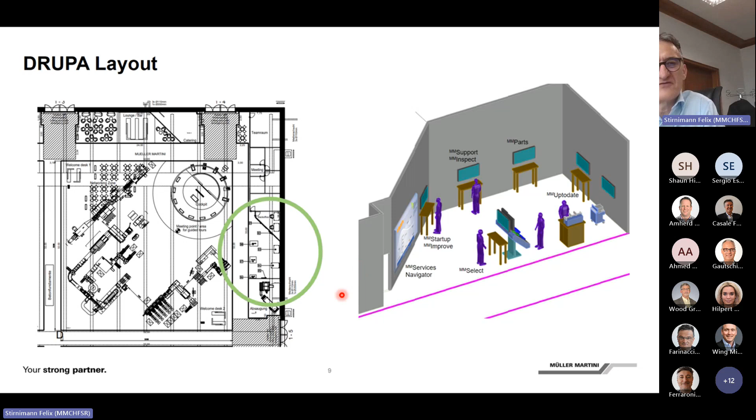That would be then the point to find the needs from the customers and to start, stimulate, or close business in services. So that's the setup we're going to have. And I would go on with the services navigator. We changed slightly the look and feel of this chart, but I would like to quickly show what's new.

So first of all, we have our service promise written here. Then we slightly adapted the logos to make them more modern. It's still with these hills like that. And we see that we have the startup here, all the basic service products here.

MMInspect, sorry, I have to say, this curve shows the capability of a machine after the installation. It gets faster, the quality gets better, the output gets better, the uptime gets better, everything gets better. But there is a point where we reach the peak, and then it starts to degenerate. And then we have our tool, MMInspect, whether it's used as a one-time inspection or during a maintenance intervention, where you go and check the machine and bring it up again.

And bringing it up again is together with Up to Date. You can do that multiple times, especially when you have a maintenance agreement. Then you have here a ripple, and the goal is really to keep the output of this machine on the highest level possible. It ends with startup, either a dismantling, a relocation, or scrapping of a machine, and then Select below as our service agreements.

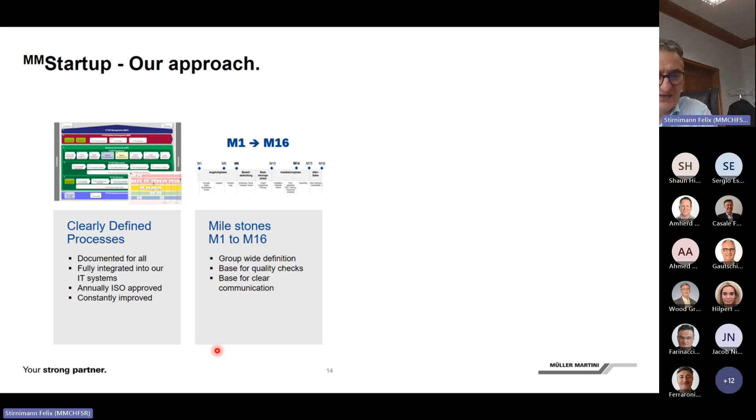We have assigned project managers for the projects, and they can be local or they can come from the factory. And the good thing, there is a direct link back into R&D so that we can solve problems in a fast way.

Further, we have commissioning types and target times. So commissioning types means we have predefined, for each project, who has the responsibility. Is it local? Is it local, but supported by the factory, or is the responsibility fully in the factory? So this is defined when a quote is done.

Then further, we have predefined target installation time as a starting point to make quotes. Although this is only a starting point, each project might have different issues so that you need to adapt the installation times. And this is as well then the base for the controlling and the reviews that we do on a regular basis.

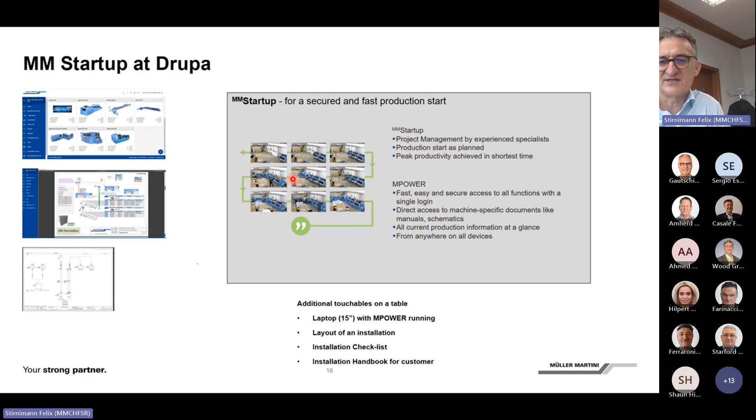Now, next, improve, as I said, is on the same post. There as well, what's the customer view about training? Things that are in the mind and keep the customer awake at night. Could be that he has retiring people, which is quite often the case. They are leaving the company, and they have to find new people. And then sure, training will be an issue.

Or what needs to be done to get more production out of the line. Then when he has an old line, will I find someone to run my machine, who needs to be trained as well? Or the other thing is, how can I keep Leo, my 25-year-old binder, because he's really the best in my operation?

And then clearly, from the sales point of view, our answer is buy a new machine, so that you have an attractive machine and keep the operators. But then when Leo has this beautiful Publica Pro, the question of the customer will be, can Leo handle this new Publica Pro technology as well, which is linked to the training.

And finally, will he be able to run 100,000 books a shift in April, so that he can really master this machine and get the best out of it? All of that is linked with training, whether the operator is capable to do that. Now, for that, we have our approach in Improve, how we can support our customers.

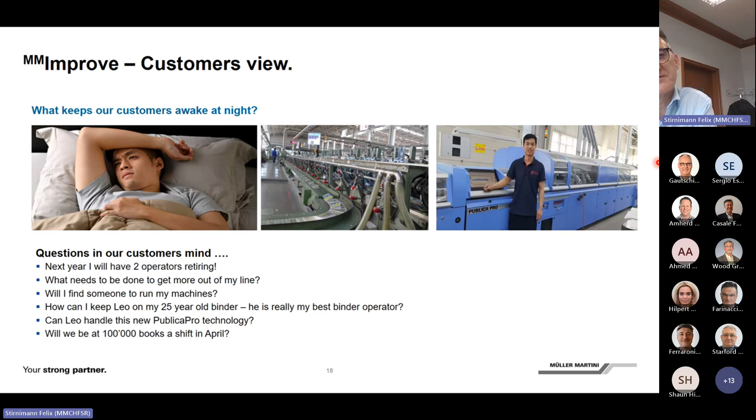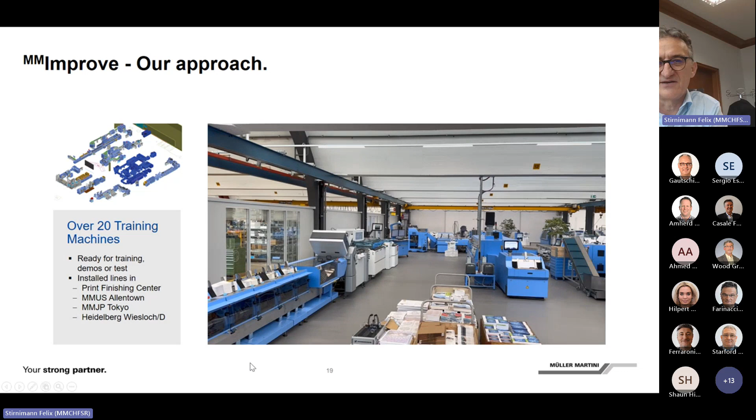So first of all, we have over 20 training machines. I need to swap the pointer. Here, that's a look into the training center for those who haven't been here lately, with all those machines where we have 20 production lines set up. So we have them here in the print finishing center. We have in Allentown in America.

We have machines in Tokyo, and we have now as well in Heidelberg, Wiesloch, a nice machine where we go if you need to do training. So we invest heavily. That's a huge investment just to have all these machines up and running, ready for training, demos, or tests.

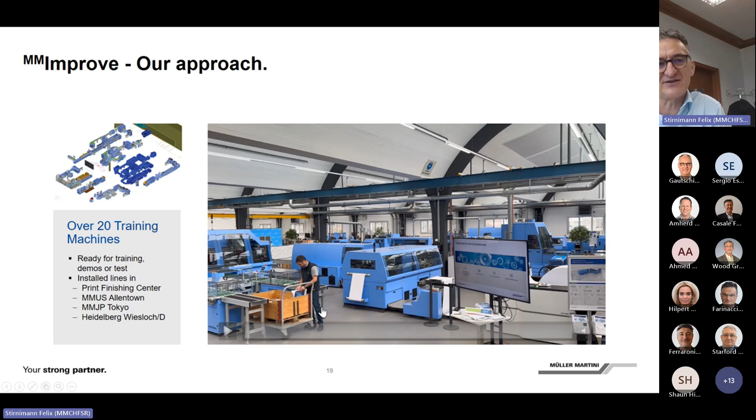Then we have very experienced trainers; on average, they have 25 years of experience at Müller Martini. We have over 10 full-time instructors in Switzerland and Germany, next to all the instructors who have a double function, who sometimes are also service engineers, but if there is a demo to do in Allentown or Tokyo, they are the ones chosen to do that. So we have really experienced trainers.

Then we have modular training blocks for customers and for ourselves, be it for Müller Martini or agents. And we have fixed pricing for the training, the PFC, where you pay 500 per day in person. For the customer we have 2 different types of products for those 20 machines. For each machine we have either a basic operator training or an advanced operator training. For this we have a brochure that explains what's in this training.

And then we have all the Müller Martini or agency trainings, where we have the basic technical training, the advanced training, the technical support training, the technical training for sales, and then the bookbinding technology training course, where we dig deep into bookbinding. And there's the MMTTT, the technical trainer training, that we are working on, which will come soon.

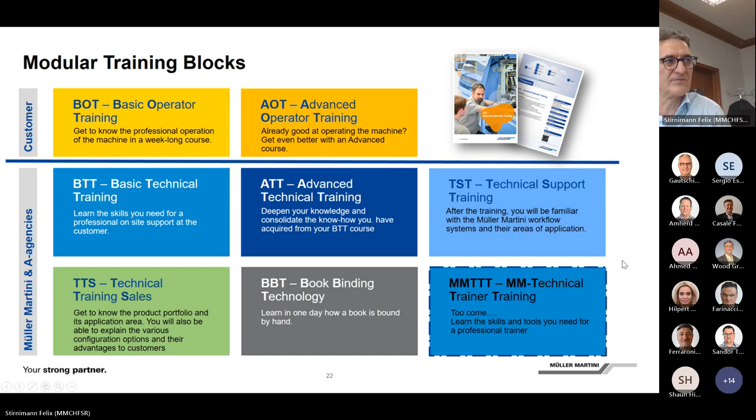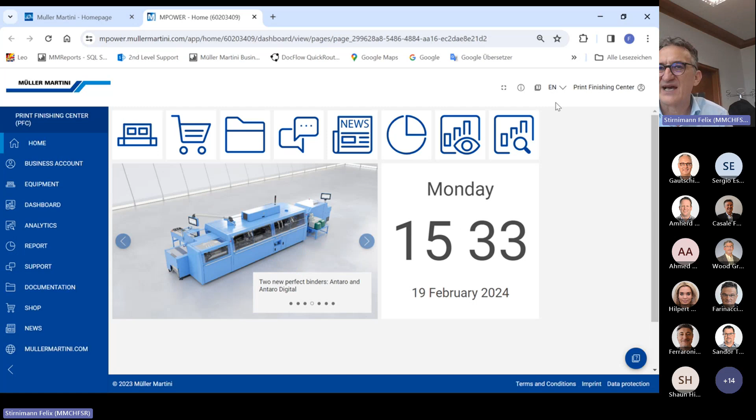Now, it's important to say I'm in as a Müller Martini employee. To be honest, I was too fast. I wanted to show something else, actually. How do I get out? Now you got me. Why doesn't it work? No. Sorry, I want to show you something different, and that's why I have to start again. Here.

So I go in here, then I say Müller Martini, then we are here, then I go to the starting page, I go to MPOWER. Now, that's normally the way you go in. Then I have to log in. Now I have different options here. I go in with my own login as a Müller Martini employee. Then I have to key in my password here.

So, and now I'm in the service point. That's something where you get all the information for all the installations in your area for the customers. You find there about it. Now I'm interested in, I go into the PFC, Print Finishing Center. You can get on the Print Finishing Center as well.

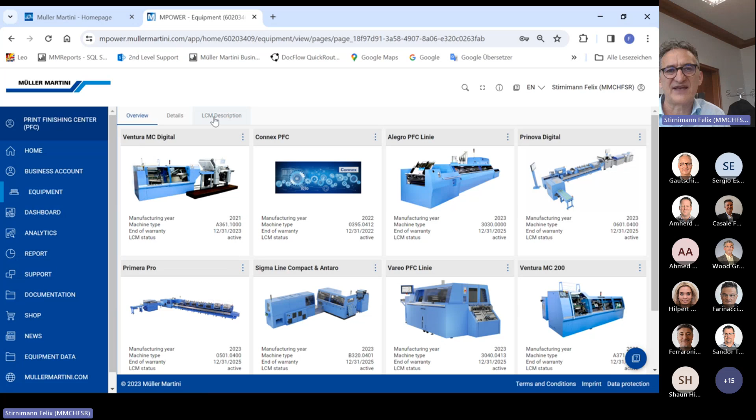That's the brochure. So you see in the brochure here all by phase for equipment, support, up-to-date and parts, what services we offer. And then you can have details as well. So you go into the various machines. So you can say, give me the Alegro. Then you see the Alegro line consists of all those elements, set up with all this information that we have. So that's what you can see of the installed base, our digital twin that we open up as soon as a customer buys a new machine.

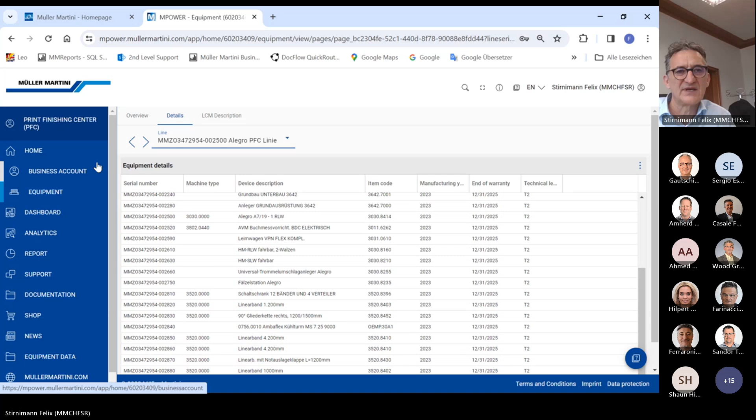Then we go on into the documentation, another important point for the customer. And before I do that, I go quickly now and change the user. Do it like this, I believe, yeah. Because I go in now as a customer. I go in like the PFC set up like a customer view. Now, yep. So I'm now in the PFC as it would look for a customer.

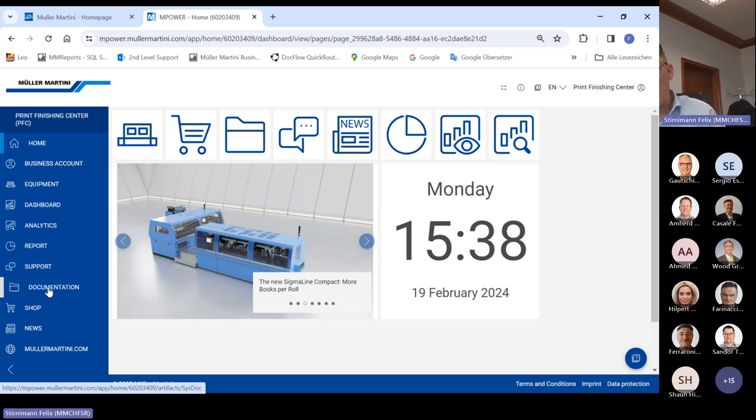And you see here up, it's not anymore this view that I just explained before. You're directly into the home. So when a customer buys a new machine, he gets the documentation, which is an important fact for the startup and the training. So here, first of all, you have layouts. Here we have two layouts. You get the assembly layout, meaning the way the machine was installed and delivered here. That's the Ventura, how it is set up, like that.

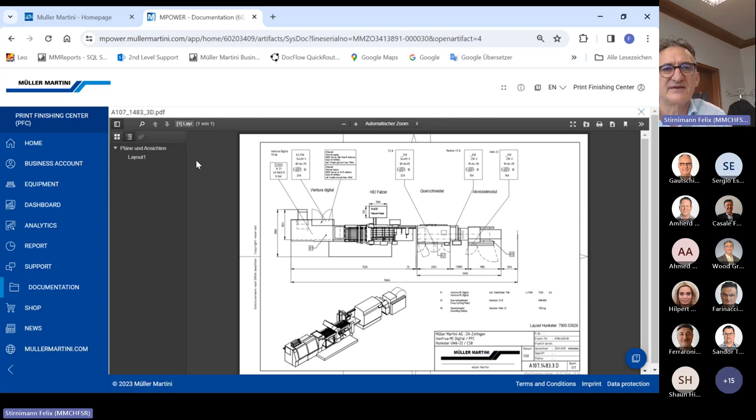That's one thing. Then I go back to documentation here. I have the network diagram. I can swap the machine. I go to Primera Digital here. Then I see here, I got the layout. I have here as well the network diagram. You can always choose whether you want to have it in this screen or whether you want to download the product. When you download, you can select the language as well. So I have English, I downloaded it.

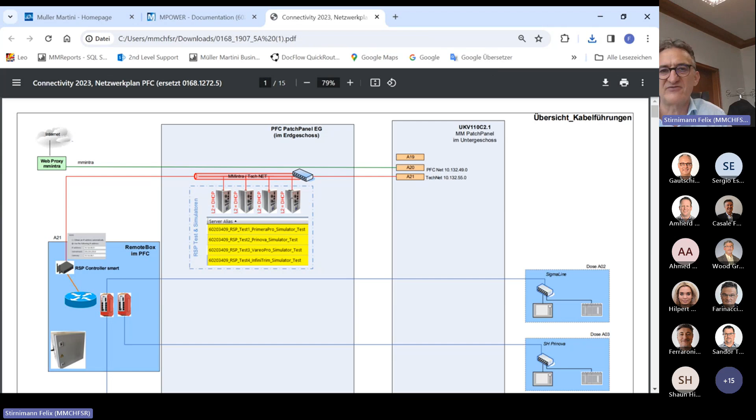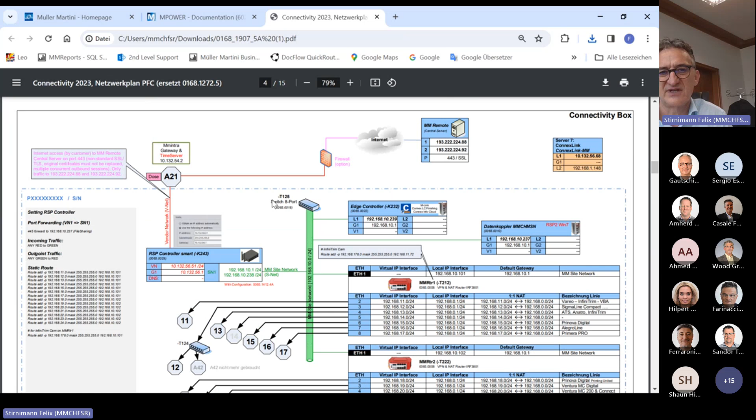And then here you see it's opened up, this download, and then you have a full screen PDF in the viewer. Now you see the setup of the training center for the network, like that. Now let's go quickly into the Primera Digital like this. I can zoom in like this.

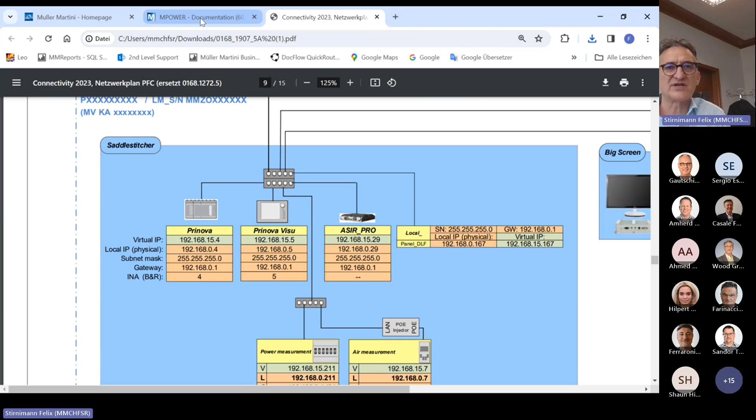So here on the saddle stitcher, we have the Prinova, we have the overhead screen there, we have the visualization, we have the ASIR Pro router. Then on this machine we have power measurement and air measurement as well, with those sensors linked into a switch box. And with that, you see all the addresses. So all such information the customer gets, we get. And it's really stored at the customer's digital twin on MPOWER.

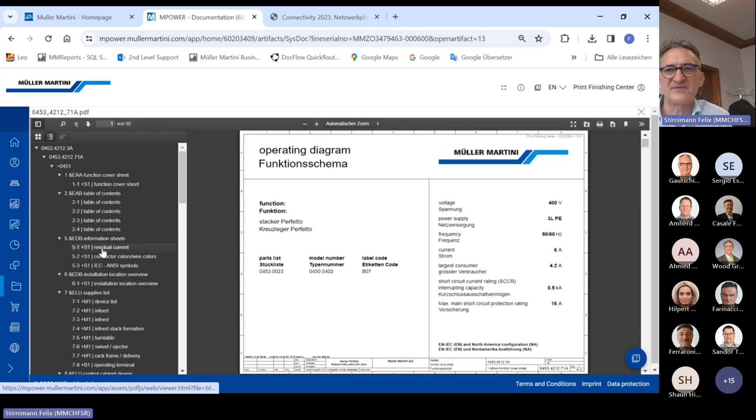Then we stay with electronics, so this corner. So we see here the schematics on the compensating stacker. So I can open up the schematics. I do it here in this screen like that. You have this function here that you can swap away the icons, or you swap them in, swap them out. We have here on the side the list of contents where I can jump to one. Let's say supply list.

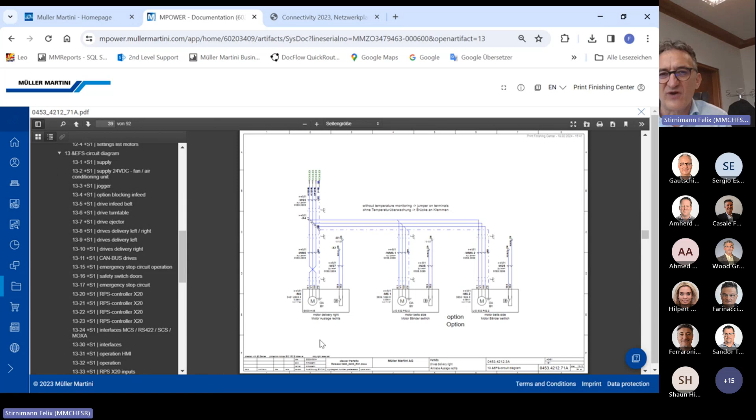Let's go down. So you see here all the items like that, and then it's a, how do I say, it's a PDF which has additional functions in it, so you can jump around when you follow a line like that, and then you go into that one, then you jump into the next sheet. So you can really follow the cable in the schematics like that. So this is one thing we got. I go back to the documentation here.

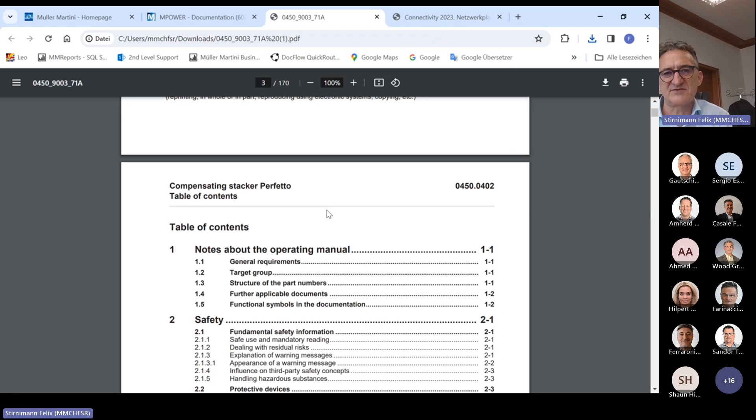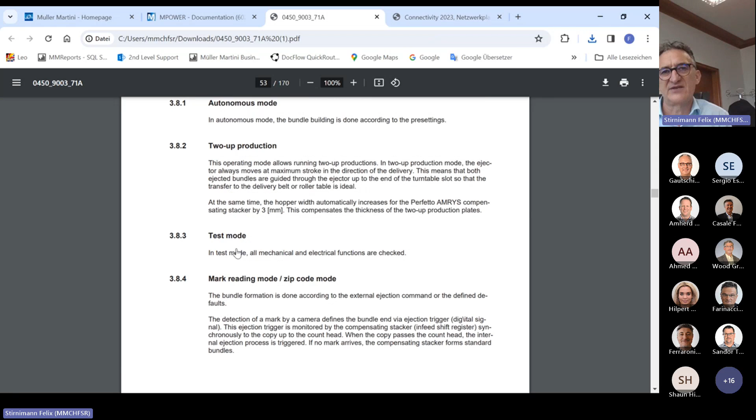So then we have the manuals, for sure. We can download the manuals here as well. Now I downloaded, let's do it here, English. I downloaded it here as a PDF. It's up here. And that's the manual as it is for our customers. Here as well, you have the possibility to jump around. So let's look for something, operating mode. You can click on it and then you automatically jump to that page of this document.

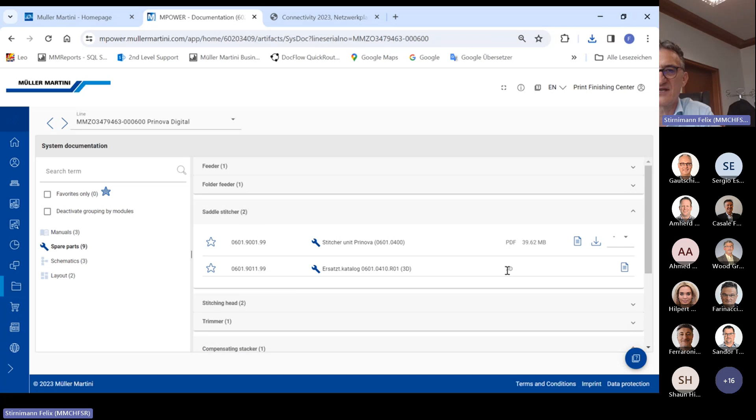So that's the manuals. And then we have as well a spare parts catalog, like this one here. So I go into the saddle stitcher. Now, with the new machines, we are now starting to come out with the 3D catalog as well. So we have the 2D catalog. This is here with the PDFs. This is still available now. But you can go as well into the 3D catalog like that, and I would like to show you how that looks.

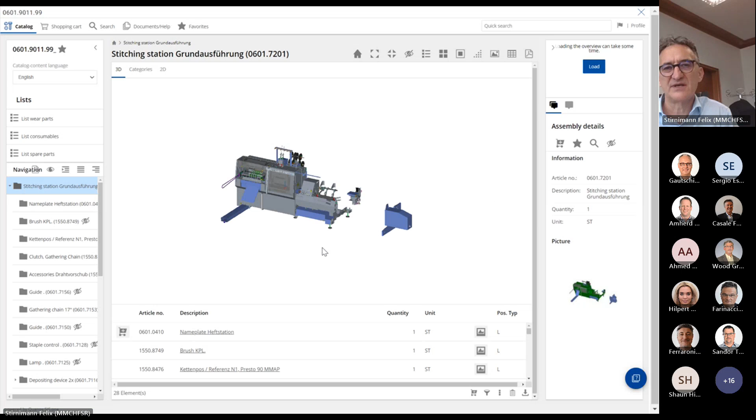Now I can make the screen larger, like this. I change to English, and it's already English here. I go into the stitching machine. Now I would like to go in, so I can zoom in. I can zoom. I can turn the machine around as I wish. And now I'm interested in something in the stitching carriage that's behind this one. So I select here, oops. This was too fast. I didn't want to have the guard. I want to have the stitching machine. I go in again. It was a double click.

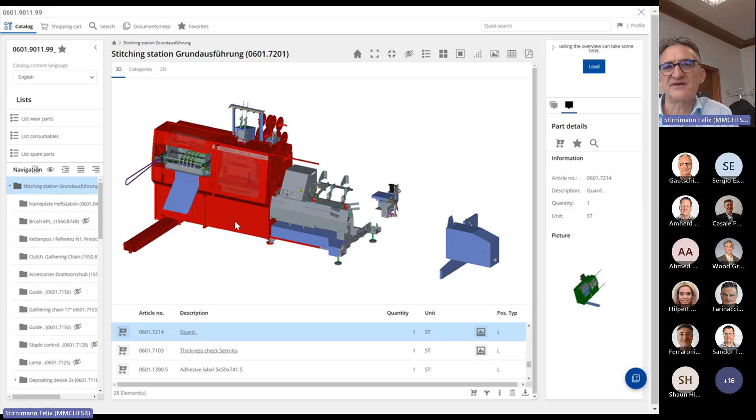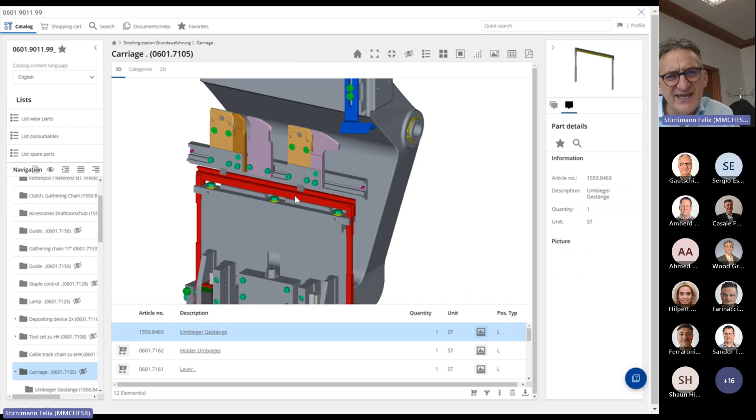So here I have the machine. The guard I don't want to see, so you can hide it here with this, so you see more. It's about the stitching carriage. That's this one. I can focus on this assembly, so it's more in the center like this. I can double click on this one, so I have now only the stitching carriage. So now I'm interested in this scale that's here somewhere. So I double click in and say, yeah, that's the scale.

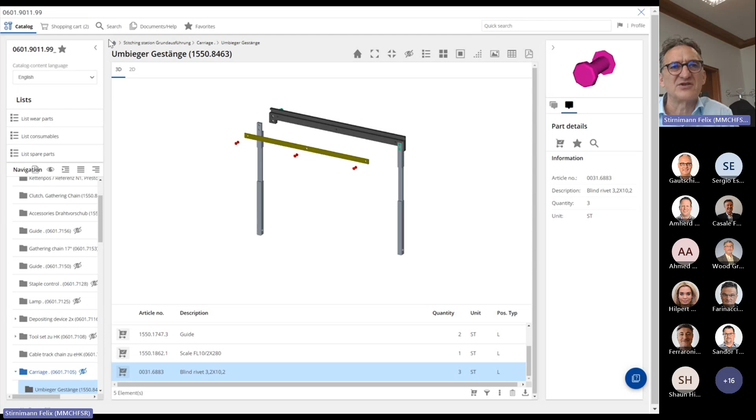I need this scale. So I take it and I add it into the shopping cart. And then I have the rivets here as well. That's the rivet, yes. I want to have them as well in the shopping cart, and add it like that. So I have here a shopping cart then. It's all done here, and then I can save it to the eShop like that. I go out here. I have the big screen. I bring it back in here so you can see that.

That's why we have not in stock. Nevertheless, if there would be, it's a Primera Digital, like always. If it's a new machine, then maybe you better call, because maybe we can arrange the product, get it out of the serial production that we are running. So this is about eShop, what the customer gets, but more to talk later.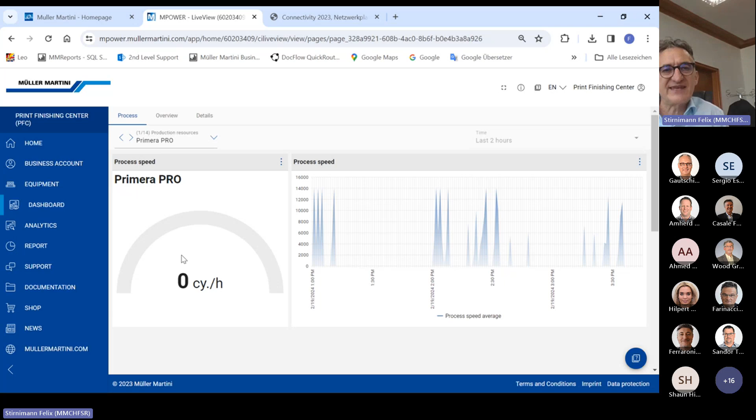And every customer gets that. If the machine is hooked up, then he can see what's the speed of the last 2 hours. And this is for free. But he needs to hook up the machine like that. And that's our goal. We want to have a lot of machines hooked up to our systems. If you want to get deeper into it, like this overview of the machines, then that would be a license that he would purchase on an annual basis.

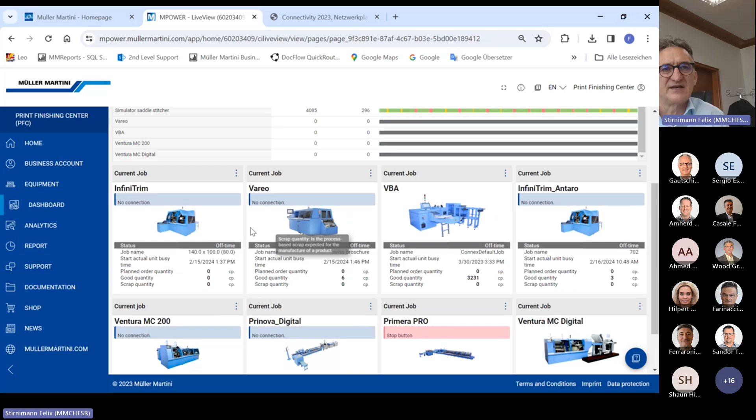Then you see all the machines, you see which machines were under production, how much production you have. So we have this view, you see an overview of all the machines. And this view is even customizable, the way you want to do it. Like that, or you have even details, then go deeper into the machines, or you see the top faults or the top stops on the Primera Pro that happened here over the last 12 hours. So you can choose the time as well.

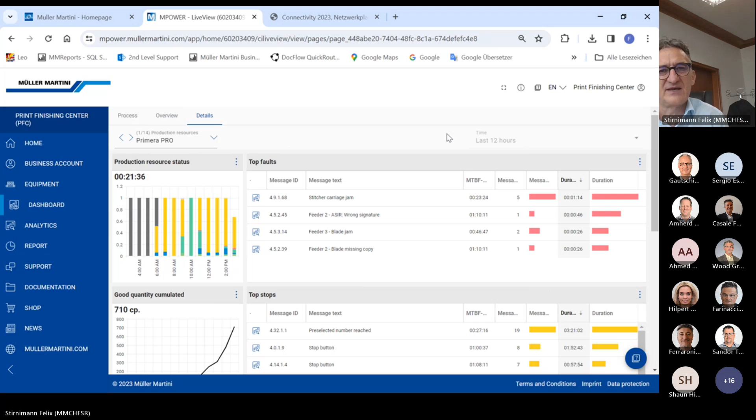Even more analytics is done with this analytics app, where you see an overview of a machine over a long period of time. You see the faults, the stops, but this tool is so mighty. Here you really have to go in and work yourself through and play around. Go on the PFC, play around with these various analytics, so that you have a good feeling what's available for our customers.

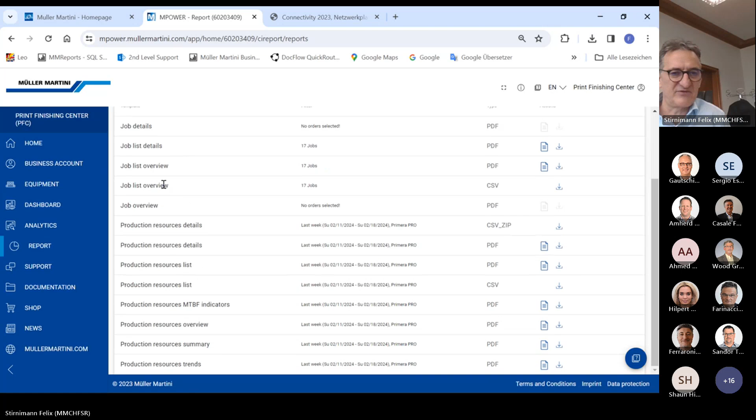Same for reports. We have here a bunch of predefined reports, really beautiful reports. And I want to put the focus on the last one here. That's the production resources trends. That's something that we promote as well during the Drupa at MMImprove, because with that you can follow the progress of an installation. I have that here. That's a trend report for a Primera Pro.

And so we have here technical indicators or operational indicators of a machine. And then you can say from this day to that day, or this month, last 2 weeks. And then you can see how is the setup. Is it getting better or is it getting worse? Or is the availability of the machine going down? What's the mean time between failures? Is it going down or up? Is the good quantity produced getting better? Production output, utilization efficiency. That's all a really nice report.

As I said, we measure that with MPOWER. We want to look at how the machine starts up, that this is really running smooth, so that we can keep our promise that we bring the machine up fast to its production speed. Now at Drupa, we have this screen for the improve portion there as well. We will have some visuals. We're going to have bullet points there, and the text that we're going to talk to would be like that.

Another important part for the startup of new equipment is having your operators understand the production line, the processes, and the workflow. With MMImprove, we offer a modular training program that can be customized to your needs. We have seen a big increase in training requests. And as a result, we have, next to our numerous field instructors, over 10 full-time instructors with an average experience of more than 25 years.

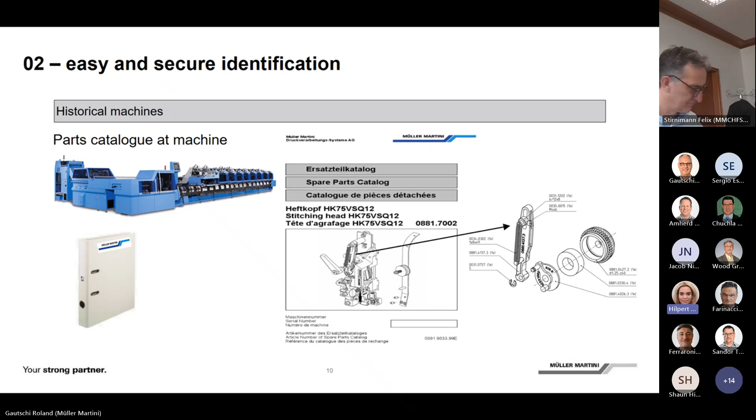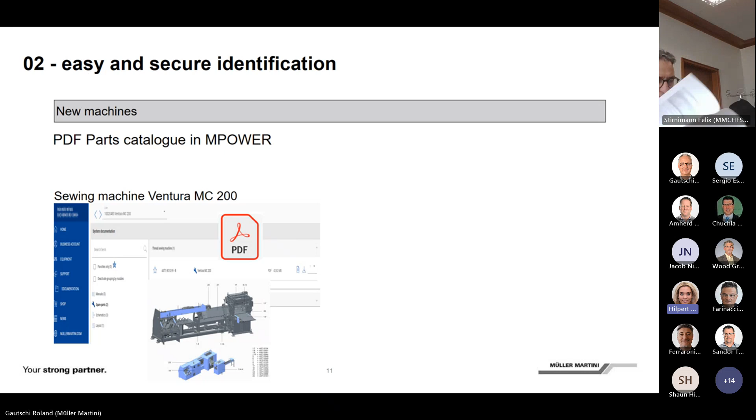Our customers have several options to identify their desired parts by themselves. For historical machines, as an example, you can see the parts catalog of a stitching head, where each component and its corresponding part number can be identified. And for new machines, as Felix demonstrated before on this sewing machine Ventura MC200, the PDF parts catalog can be directly downloaded in MPOWER, and the new 3D parts catalog on the right-hand side is also available in MPOWER.

Furthermore, the customer has several options regarding pictures to identify the required part. We have camera pictures, single as well as 360-degree pictures, which we make for commercial parts as well as parts with high consumption. On the other hand, there are CAD rendered pictures, used for drawing parts with low consumption and low value parts such as screws and bolts.

The customer also has the opportunity to download the documentation for some spare parts. And now to show you more in detail, I will enter the eShop and show you a few pictures and the mentioned documentation.

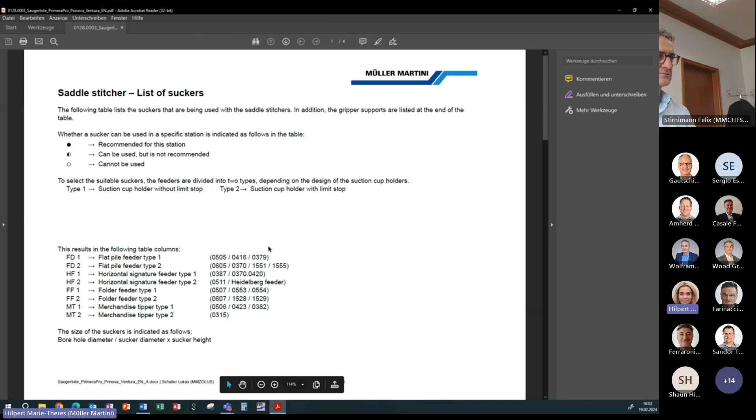And also the documentation. For example, this sucker here. We have the documentation in German and in English. And if the customer clicks on this link, then the PDF will pop up. And then here's all the relevant information about suckers and caps.

Okay, Roland, can you please bring back the presentation? Yes.

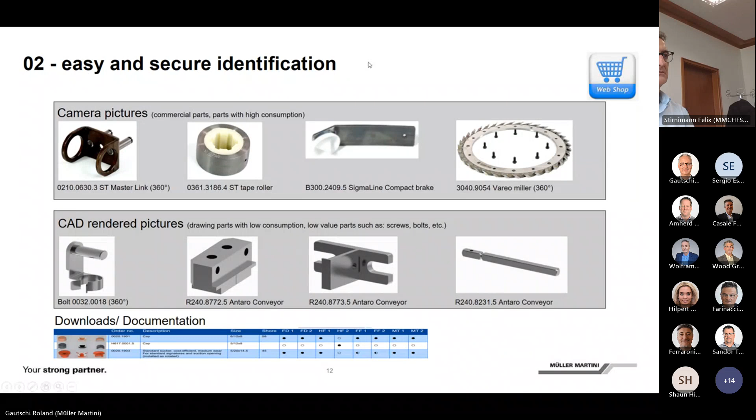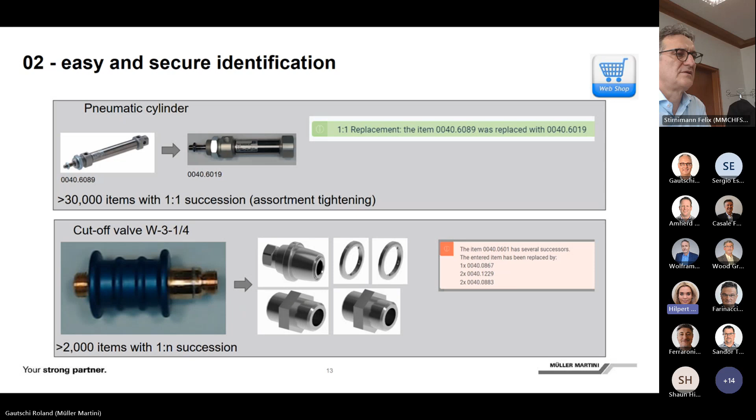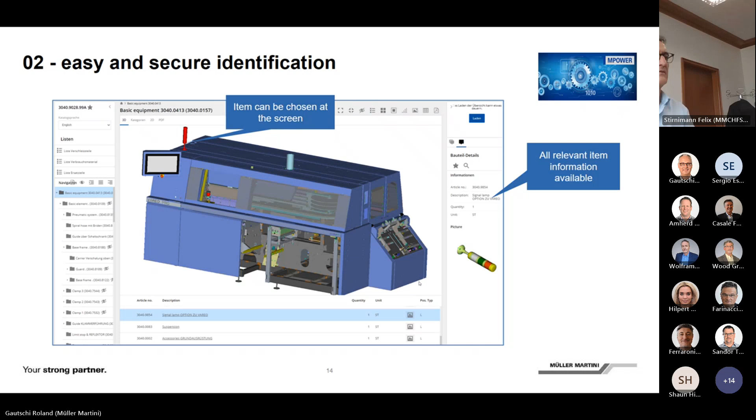And now I will hand over to Roland again. Okay, thank you, Marie-Therese. Thank you.

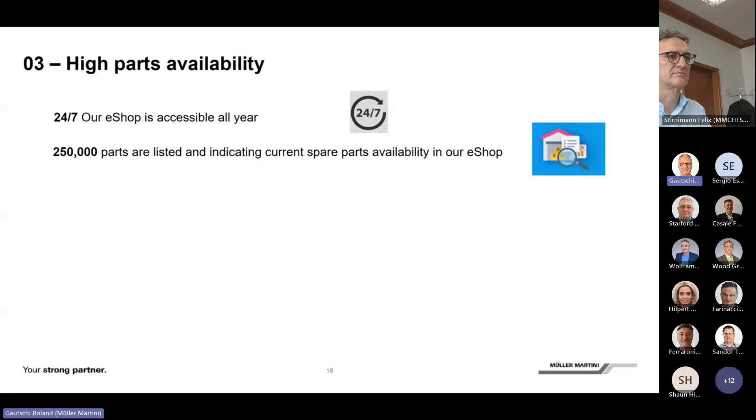Okay, now we are coming to the high parts availability. And we are really good at supporting you in parts. Please remember that. We have our eShop, and this eShop is accessible 24/7 all year. So customers can look for specific parts and availability all the time. We have more than 250,000 parts that are listed in our eShop. We are indicating current spare parts availability in our eShop as well.

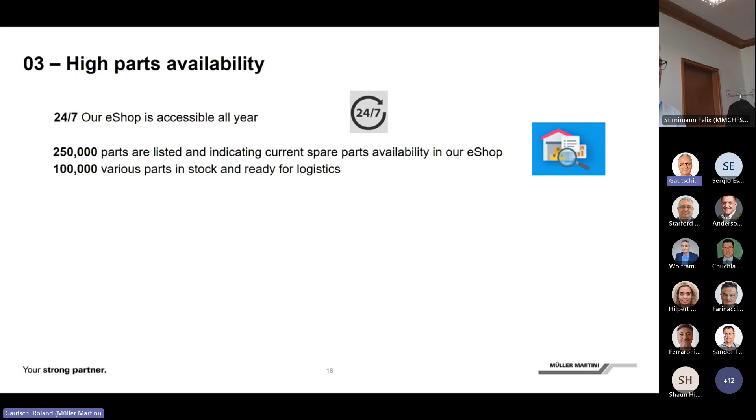We have 100,000 various parts in stock out of these 250,000, and these are ready for logistics. And that's the 100 million Swiss francs we have invested in parts. Besides that, we also take care of parts that got discontinued from our suppliers. So we have roughly 1,000 discontinued items in stock, and these are worth 10% of our entire spare part stock. So it's also a high number we have here to support our customers.

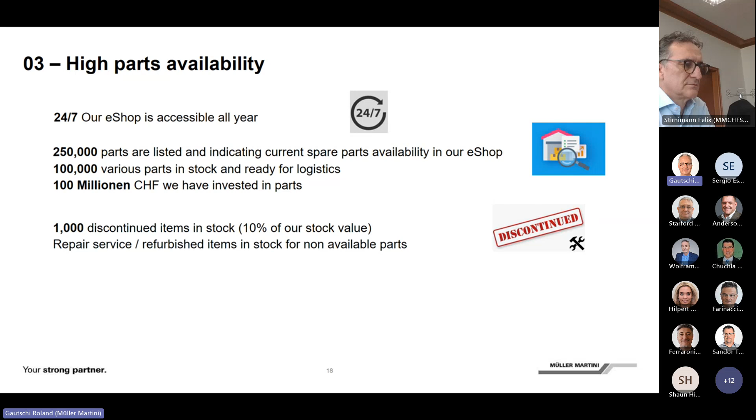And besides that, when a part is not available at all anymore, we have a repair service, and we also have refurbished items in stock for such parts. Now we are coming back to the same picture we had before, and Marie-Therese will show you more specifically regarding availability, delivery times, and so on in eShop. Yes, so I will take over again one more time. So I've talked about the identification of these parts before, and now I will show you the availability in eShop.

For example, this master link, I've put in 50 pieces of the order quantity, and 34 pieces are now available, and the expected delivery time for the other 16 pieces is 5 to 7 weeks. Or this bolt here, we have 70 pieces now available, and 30 pieces have an expected delivery time of 1 to 3 weeks. But there's also a third possibility.

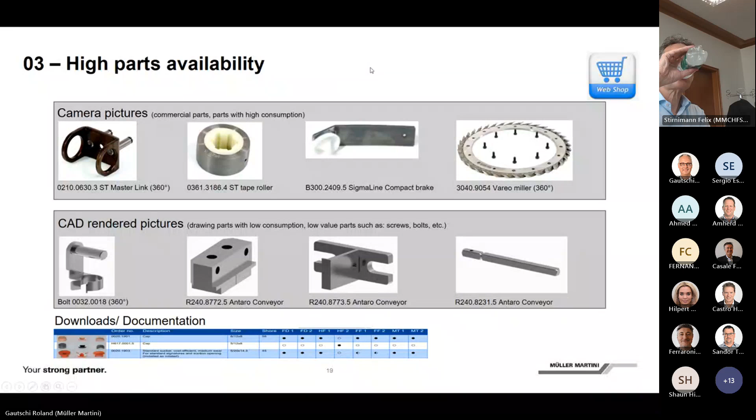Good. Last buy items. As I told you already, 10 million Swiss francs or 10% of our stock value we have in last buy items. These are over 1,000 articles or 16,000 pieces we have in stock, and an additional 21,000 pieces that are available at our suppliers. We bought them already and can have these on demand.

Only in 2022 and 23, we placed purchase orders for over 10 million Swiss francs for such items. And for some items, we have to do a yearly maintenance for servo converters and frequency inverters. That costs us also a lot of money, but we take that to make sure these parts are ready to use for our customers.

Here you see a picture of this so-called forming. This is something we have to do every 2 years, and we are charging the capacitors here so that this is fully charged and the customer can use it.

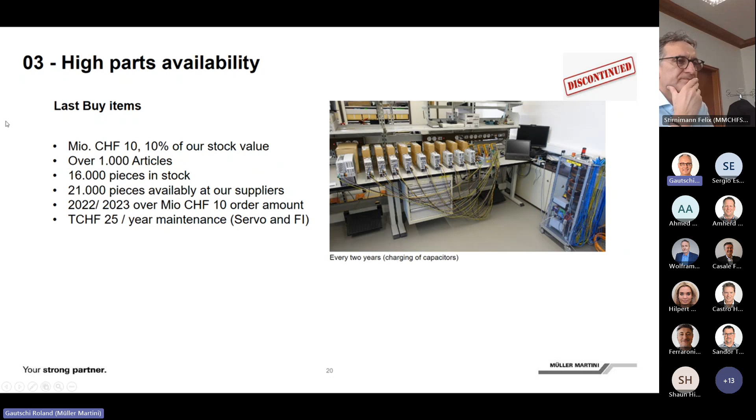Here a few examples, servo and frequency inverters for motors. We have on one hand the servo converter 9300 from Lenze. This one is in use since 2010. The discontinuation was in May 2017, and in 2019 we took a last buy of 100 pieces, roughly 500,000 Swiss francs.

Another example from Lenze is the frequency inverter 8200 Vector, also in use since 2010, discontinued in May 2017, and also here in 2019 we did a last buy of 350 pieces. This was a purchase order of 2 million Swiss francs.

And the newest one was the servo converter ACOPOS from B&R. This one was also in use since 2010. The discontinuation we got last year in January, and we had to do the last buy already in summer. And it was over 800 pieces, roughly 2 million Swiss francs we invested there as well. So 3 examples that we are investing a lot for such parts.

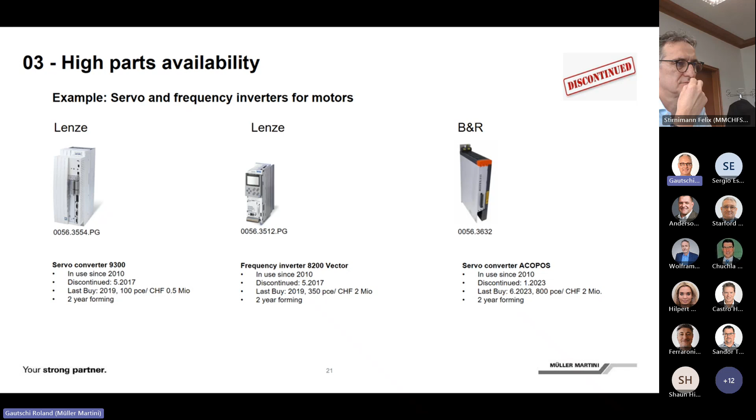If we do not have the parts at all anymore, we have a last chance to help our customers. This is with our repair service. So we are repairing defective parts from the customer. He will send it to us. We will repair and send the same part back to our customer. So we have nothing in stock, but simply a repair service of more than 100 items with these .R items that are active so that we can support our customers.

For example, you can see it here for the control unit. 2 examples here, roughly 20 pieces a year on the left-hand side, and here roughly 10 pieces a year on the right-hand side. So it's quite common to do that for our customers.

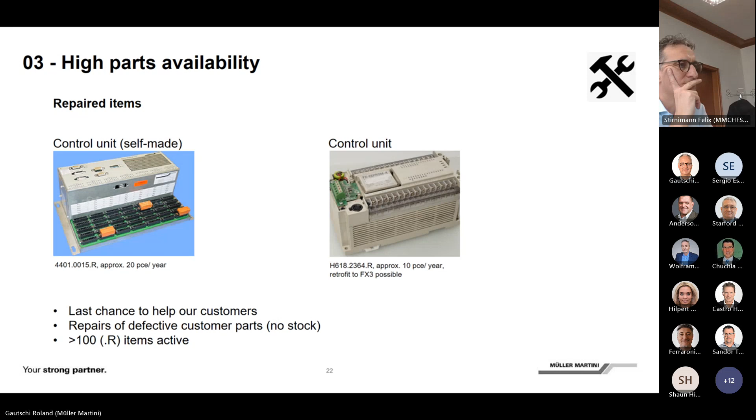Here you see the parts availability from stock for parts with frequent consumption. So the target line is at 91%. And back in 2018, we had a good matching, let's say, more or less of this target line, but then got hit by the coronavirus. We also got hit by the war that is going on in the Ukraine.

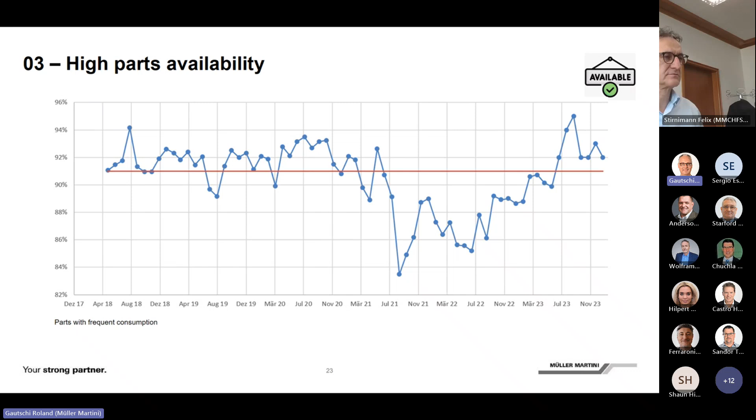This brought us down during the supply chain crisis in 21-22, but then we made it up again, slightly but steep, and are now back at the target. And yes, we can be proud that we have a good availability again to help our customers bring up their machines relatively fast.

Besides looking just at the availability of parts, we go a bit deeper and we look, okay, what's the machine behind? Is it, regarding our life cycle management, an active machine behind, a secured one, a limited or an obsolete? And of course, for active and secured machines, we have higher targets to support our customers than we have for limited or even obsolete machines.

If there is a high demand, normally we have a prognosis behind and we make sure that we have a high availability, that these parts are almost always in stock to send out to our customers. When we have a low demand for active machines, of course, we can sometimes go back to the factories that have something in stock that we maybe do not have at the ESC, and help out like this.

And also for the secured parts, we will look a bit closer, and even for parts that have longer delivery times, we make sure that these parts will be available in stock. When we go to limited machines, then with high demand, it's also with the prognosis. But when there's a low demand, normally it's on request, and we do not have these parts in stock anymore. And when we have an order from a customer, then we have to purchase the parts. And the same on the obsolete side, or sometimes we don't have a possibility anymore for the obsolete parts.

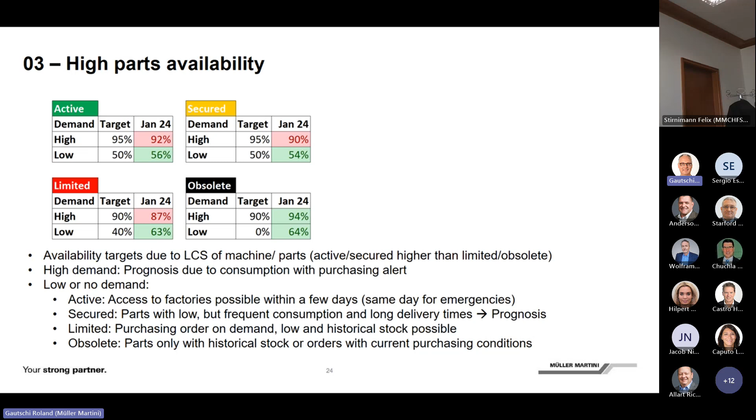Now, coming to the next slide regarding notifications to our customers. So Marie-Therese will explain a bit more in detail about this. Yes, so this slide indicates a timeline of email notifications once a customer has placed an order in eShop. First of all, he will receive an order receipt that he has placed an order in our eShop.

Then the order confirmation with the shipping date will follow, and maybe an update if a part on his order had no confirmed delivery date before. If there is a delivery delay, he will of course also be informed. And once the shipment has left our warehouse, he will get a delivery notice and he will be able to track his order, and the shipment will be delivered in time, and then we will have a happy customer.

The advantages here are that this process has a high transparency from order to delivery. Changes in planning can be considered, and we have a delivery performance of 90% with our logistic partners, which is quite good.

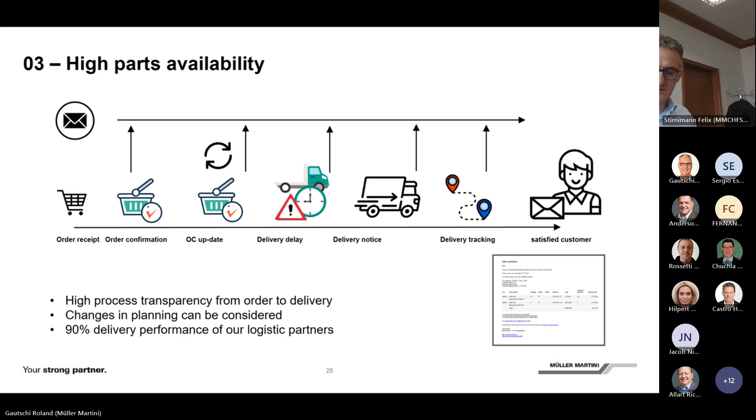Now I'm summarizing about the high parts availability. We have our really good eShop that is accessible all year, gives our customers and our market organizations real-time stock indication. You can see the confirmed goods in from our suppliers. We give indication of standard delivery times. These all lead to less errors, less communication back and forth, actually.

We make sure that we have availability for active parts, for parts with high consumption. We also will prepare kits for newer machines in the future, so that these kits can be used for maintenance and can be exchanged directly at the customer machine. We also make sure that we have critical parts in stock, even when the consumption is not that high. And of course, the parts with frequent consumption, we take care of regarding our prognosis behind.

Also for upgrades and retrofits, we are looking for possibilities to make this possible for our customers, so that they have something they can order. It's important to have this for active parts. On the other hand, when we have inactive parts, discontinued parts, we are considering last buys to help our customers. We do maintenance for these parts, and last but not least, we have a repair service so we can help our customers even if parts are not available anymore. This all leads to a good availability from stock.

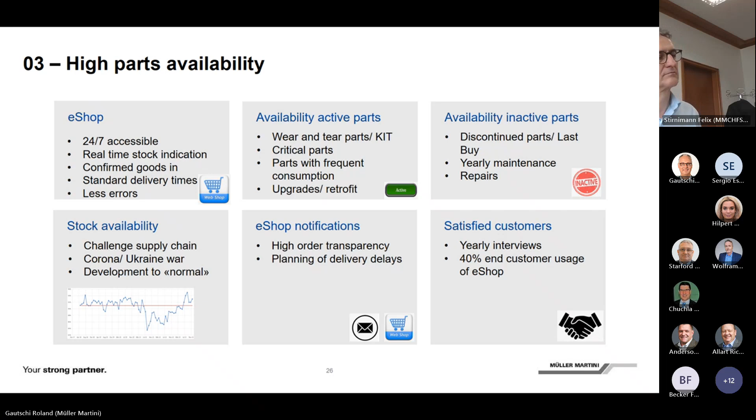Now we are coming to the Drupa show. Also here it's a similar approach as Felix already explained. We will have the Drupa walk on one hand, that will guide you through the whole Drupa booth. Then we will have a monitor with some visuals on it and bullet points that will indicate some benefits. We will have a table there with objects, with spare parts. There will be last buy parts to talk about, or maybe wear and tear parts, typical ones with a high availability. You will have the cheat sheet that will support you.

And now I will also give you an insight into the Drupa walk. And this can be something like that. We are really good at supporting you in parts and minimizing downtime of your machines. This is not just because of a huge spare part stock, it is also the secure parts identification and the fast, easy and transparent ordering process with our eShop. Just remember the four numbers: 100, 100,000, 100 plus, 90% plus.

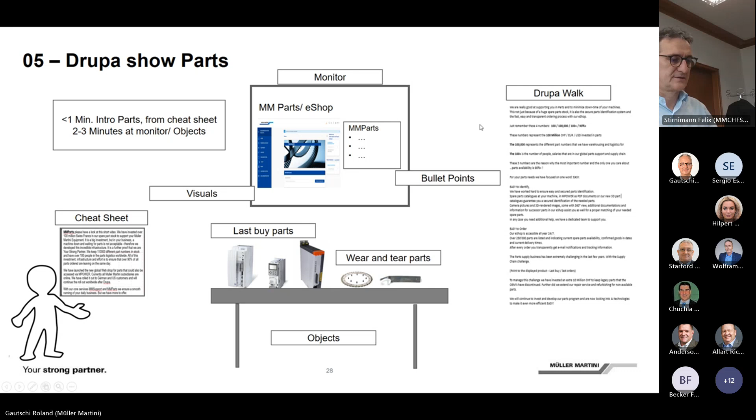Good. Are there now any questions in the chat? Yeah, Hector is asking whether it will be possible for customers to purchase parts during Drupa. We've been talking about it already, but have not made up our minds finally. And we have to think. So I think for Brazil, definitely, what can be done? People can come to Switzerland and purchase it here. That's possible. Yeah. That's possible.

I think we have to do so because it's not possible that they can come to Germany. They have to come to Switzerland. We can sell the parts here from the ramp, so to say. Roland, come on. Yeah. Let's think about it. Hector, we take it up and have a look at it. But either here in Switzerland, I just wonder what it would be when we would ship it to Raden or something like that, if there would be a possibility. But let us think again about it. Yeah.

That's all. Are there other questions from the group? That would be the moment to bring it in. You could bring it in as well with the microphone. You can open up the microphone, no problem. Otherwise, Felix. Yep. Rich Allart, how you doing?

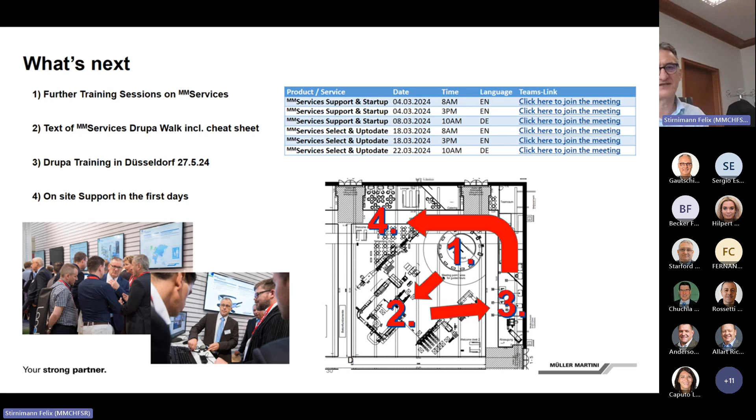Now, why do I push that? I push that because in the Müller Martini Group we have set the focal point for this year on a sales push in services. Those are the focal points. We said a sales push for parts. We had quite a drop in spare parts business last year.

And this is somehow logical, because the overall worldwide paper consumption goes back, and if paper consumption goes back, spare parts go back as well. But we need to do everything in our hands to stimulate the spare parts business. On one hand, we have the reactive spare parts business. That's where the machine stops, we have a break, the customer needs a part urgently,

and we need to organize it. But we have proactive services like the maintenance agreement, the relocation, the inspection that have a really high impact on spare parts consumption. So for the Müller Martini Group, it's important that you stimulate a lot of those deals, close maintenance agreements, search for relocations and get them, and inspections as well. This is really a big portion that has an impact on parts.

But next to parts, we want to promote the remote services, being helpline, remote line, or e-call agreements. You'll see that in the training session from Rito, where we talk about that. MPOWER apps, the dashboard analytics, the reports: this is steady, annual income for us. And training as well, whether here at the PFC or on site by a factory instructor or a local instructor.